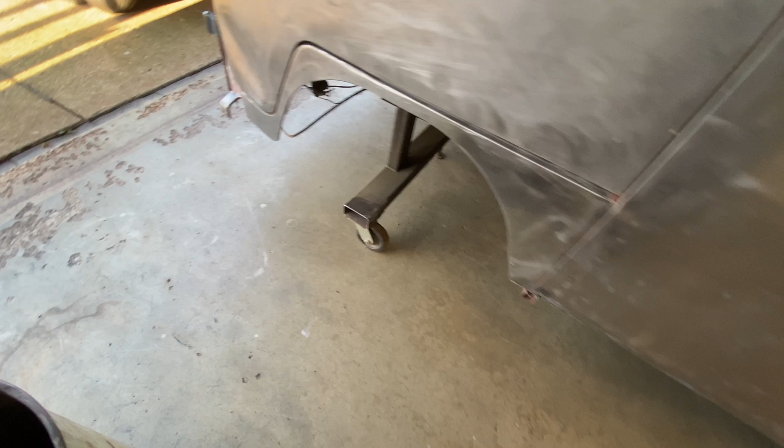Okay, so here's my plan. I already have this cart underneath the bus. I started cutting out these attachment plates that will get welded on to the cart. That's going to be over here. These plates get welded on here, and I'll drill some holes, be able to bolt the other plate to it.

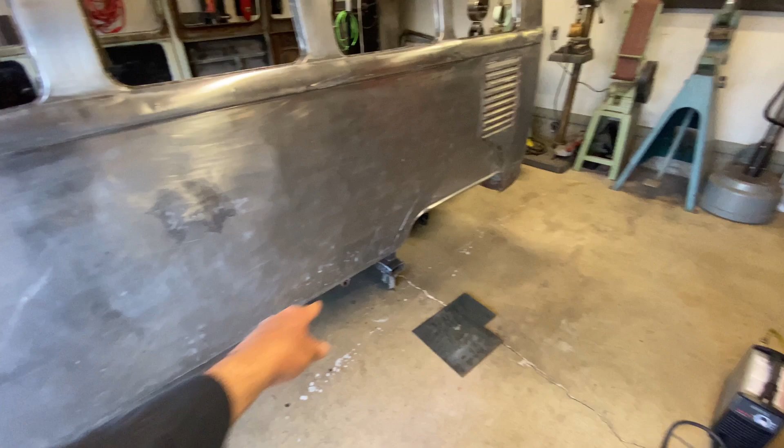That way it's removable. There's going to be a box tubing that goes the full length, front to back, full length of the bus, to be able to push off of. So this leg here will attach to this box tubing, and then there'll be this arm that comes up.

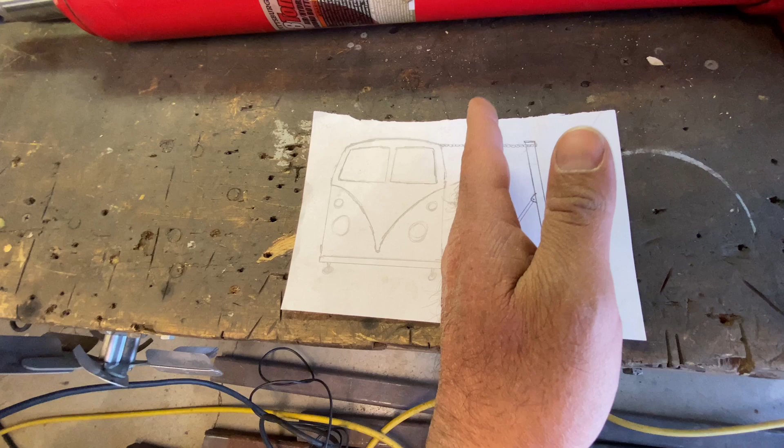And with this is a Harbor Freight pneumatic jack that's going to be right here, that's going to push this arm out, and then with a chain and maybe straps or different attachments hook onto the bus and start a controllable pulling of this side of the bus out.

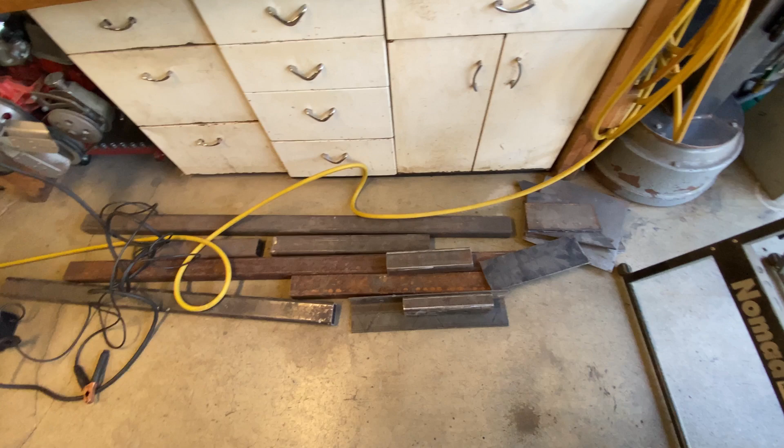I have most of the metal. This is a lot of my scrap metal that I already have laying around. So that's most of the materials, but I need to get this box tubing that goes the full length of the bus. So that's my next step. Let's take a ride, get that piece, we'll see what we can find.

And then once we get that, I want to start with that piece and then work my way out and make the jack. So let's take a ride to the metal store and try to find that piece.

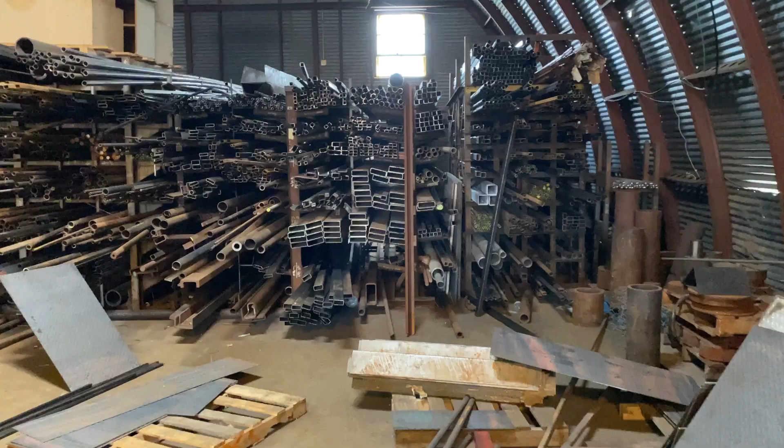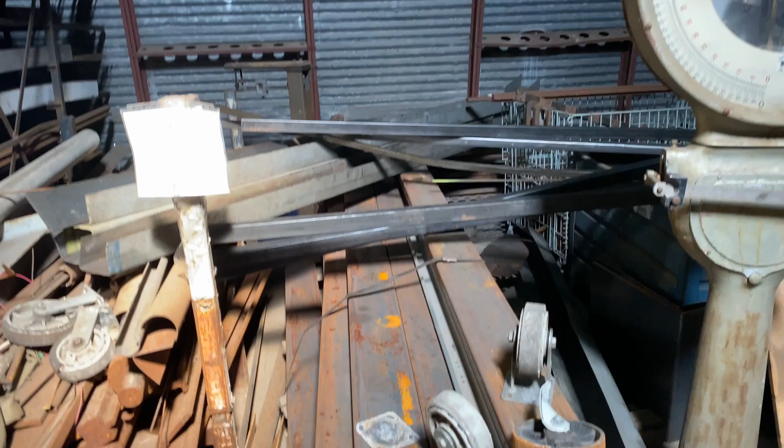All right, what I'm looking for is in here somewhere. Maybe in this back wall. Maybe one of these pieces. Precision scale, no, it's off.

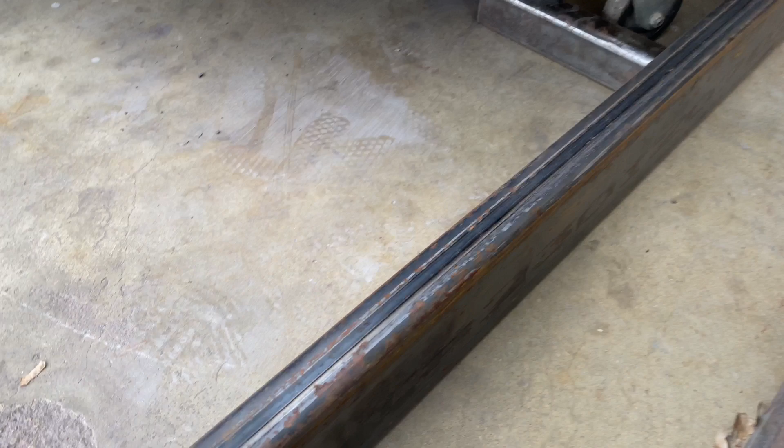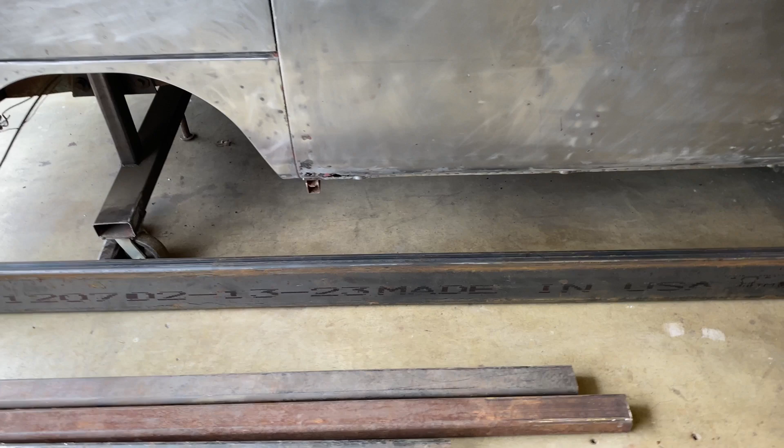Okay, so this is what I went with. It's this 2x6 box tubing that I found on that back wall in the hut, and it's definitely gonna be strong enough. And they had that whole section with these 10-foot pieces, and then I just had to add another 3-foot section, so I'll have to weld it, and then that'll make up the full length of the bus.

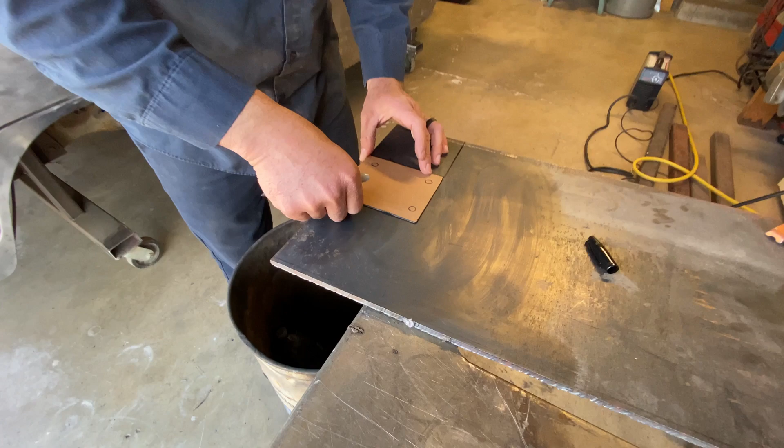All right, so I'm just going to trace this out and then cut them out, and this will be the attachment plates that attach to the cart here, and then I can bolt this box tubing on and then take it off after I straighten out the bus.

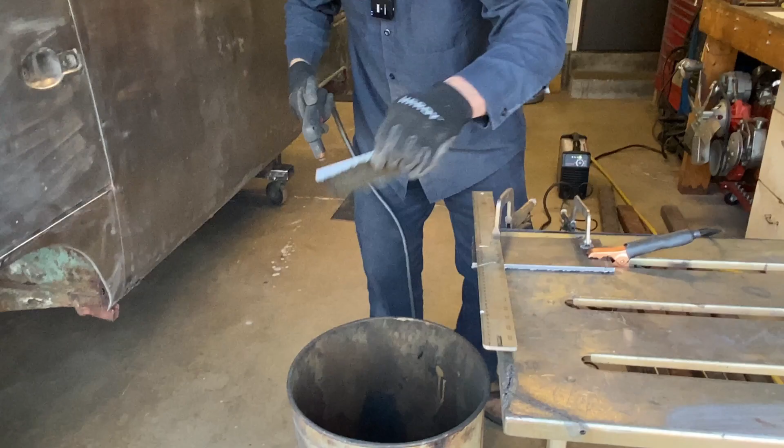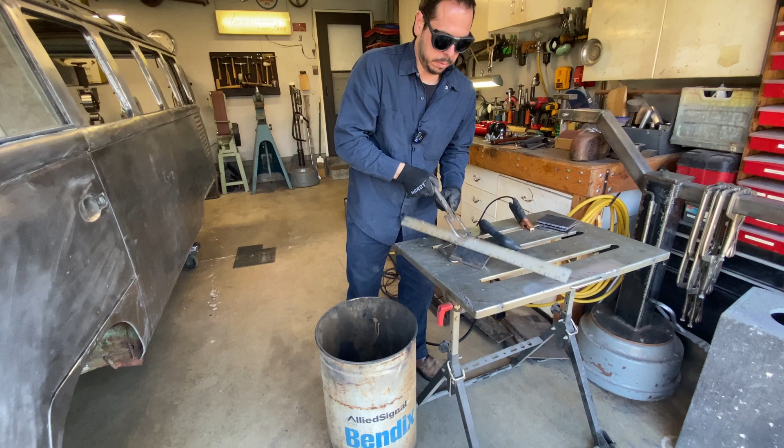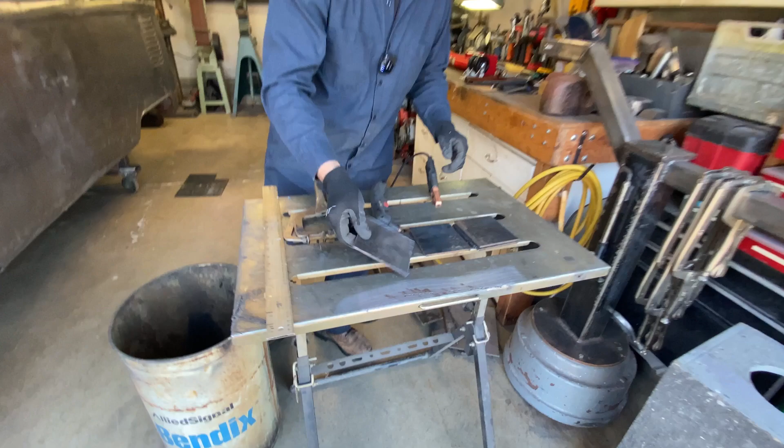Okay. Those are my plates. Those need just a little bit of cleanup, knock the slag off.

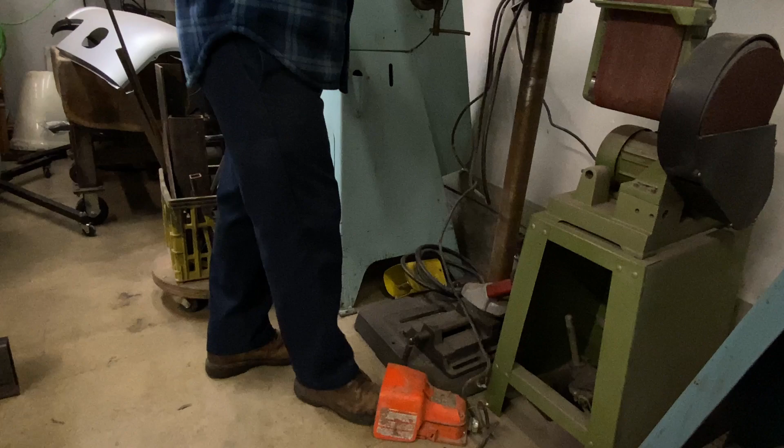I got my drill press hooked up to this foot operated switch. So that way I can just turn it on with my foot. So if things get a little hectic, I can just let go.

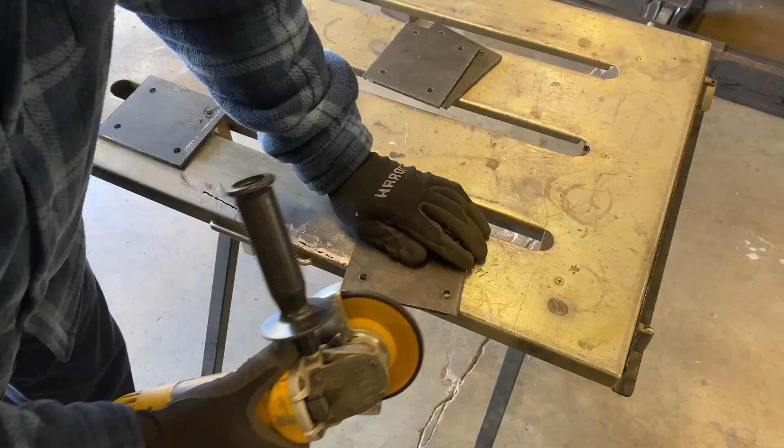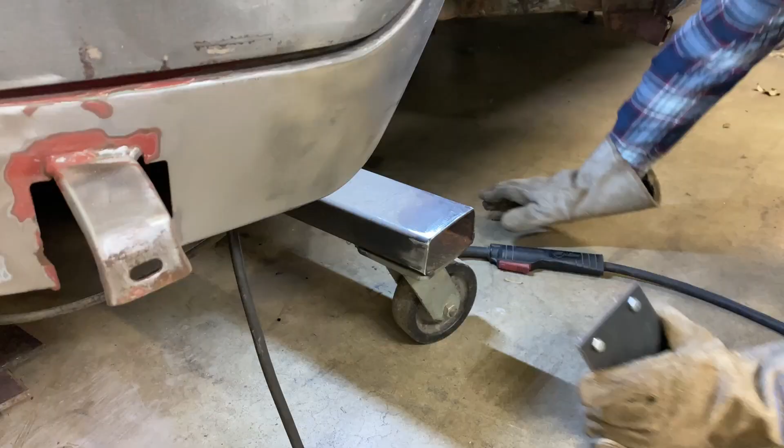All right, probably start with welding these plates on here. And then I'll weld this piece together. Let me get this out of the way for right now. I position it to where I can get it on and off. That looks pretty good. Let's tack it for now. Make sure, probably mock everything up, make sure I like how it's looking, and then we'll fully weld it on.

Okay, one done. Okay, let's see if we get this mocked up there. I got some boards I can put underneath it. Higher. Maybe I can turn it sideways.

Maybe. Yeah. Let's see what that looks like. Yeah, it looks pretty good. And then with that little extension, I'll go full length of it. Okay, let's do this one.

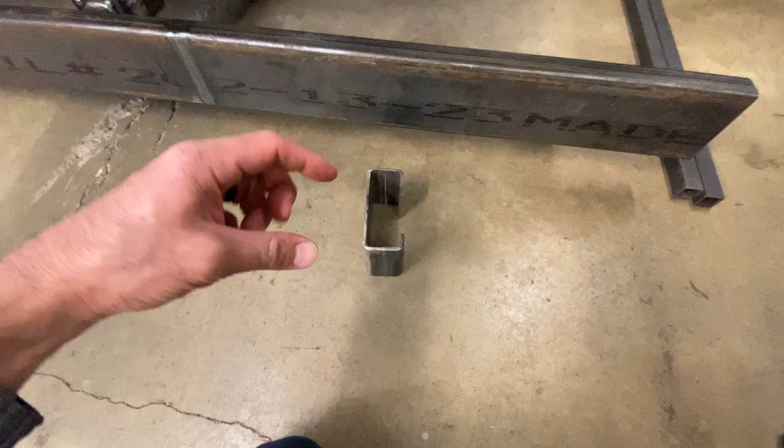Okay, I got that all welded up and bolted on. So that part is done. And I started making this piece. Now this piece is going to lock the puller on to this box tubing. So this was a larger box tubing that I had, and I cut it down and re-welded it to fit this 2x6 box tubing. And I wanted this attachment to lock on here.

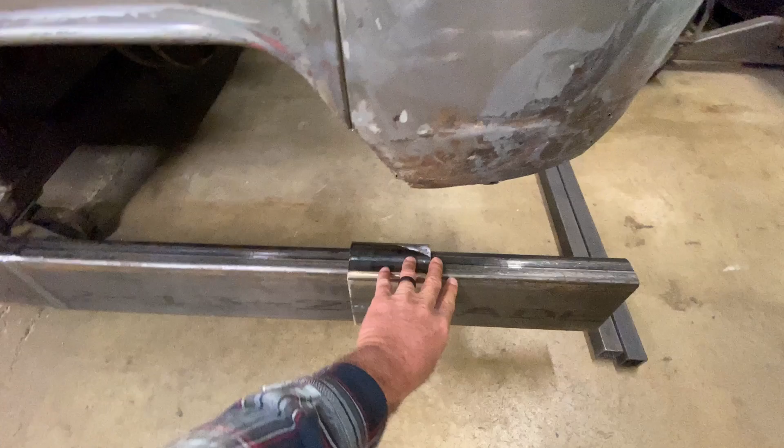That way, when I start pulling, it locks the bottom of the jack assembly on this box tubing. And I can then slide the whole jack front to back easily, and I'm going to have the casters on this end of the jack. So that should work pretty good, full range adjustment.

So now I want to start working my way out. So I'll probably mock up the jack on blocks of wood, get a good idea how far out I want to bring it from the bus. I don't think it'll have to be too far.

And then also, I may add some extenders like this box tubing, because this is just kind of sticking out here and I'm going to be pushing on it. It's going to be pretty strong, and I'm sure the roof is going to move before this does.

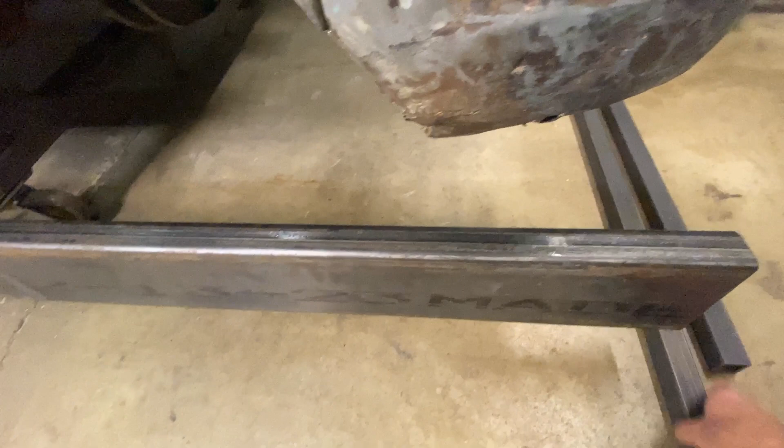So if I have to, I'll add a leg that comes out, and I can just add a leg. I can just do a couple of tack welds onto the cart and then out to here, and that will strengthen that. So I might do that too. This is just extra metal I had laying around, so we'll see if it needs that. So I can do one in the back and one in the front.

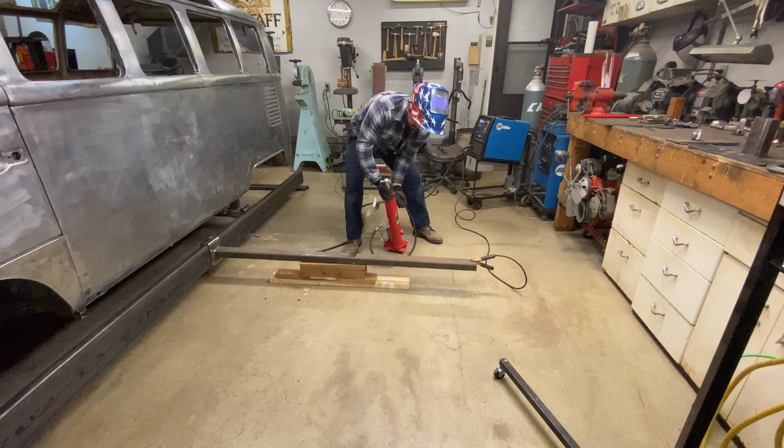But let's start on this part. So let's mock up this whole jack piece assembly, and then we can start building it up. All right, let's kind of get an idea where this needs to go. This is going to get cut down. I'm just not sure how much yet.

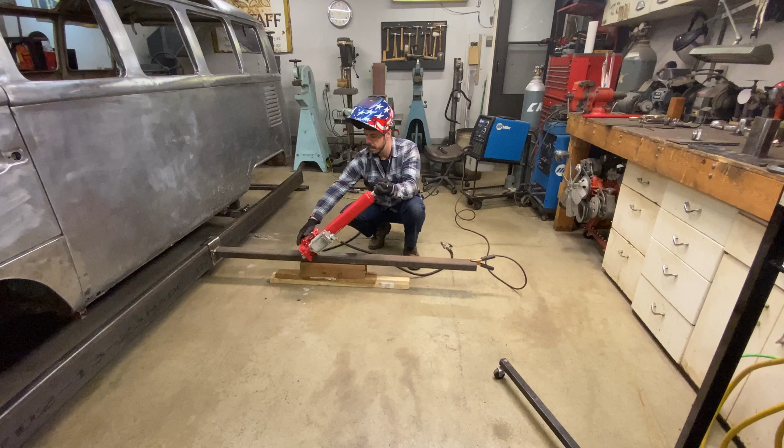It's pretty far away. Maybe about there. This will be extended. If I cut this here, I don't want it too far out. I don't really need it to be very far away. Let's clean that off a little better, a little closer.

Bolted here. I think that looks pretty good. I'll tack it, we can move it if we've got to.

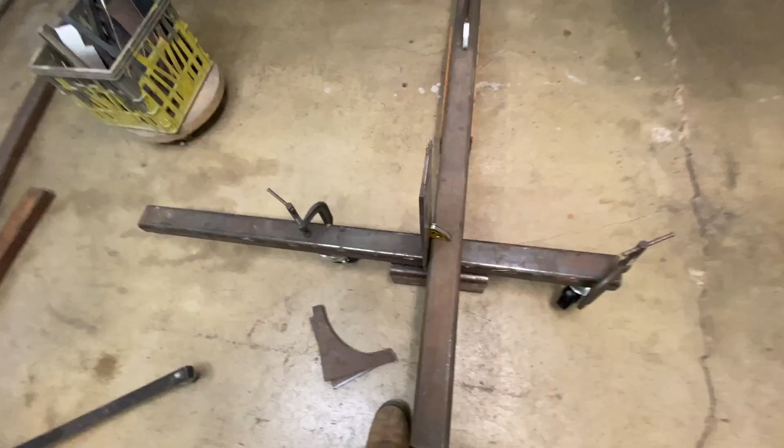Okay. I'll cut this in half. I got enough to put it for both sides. Drill it. Then that box tubing, this is the same size here. And this could be up here. Yeah, I like that. I'm gonna finish bolting these wheels on.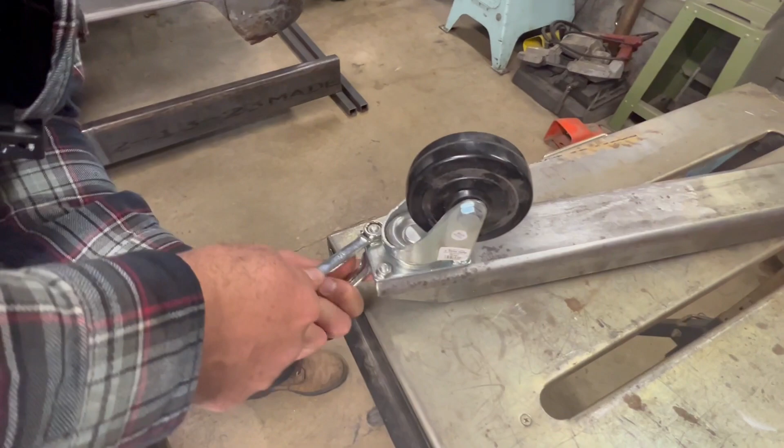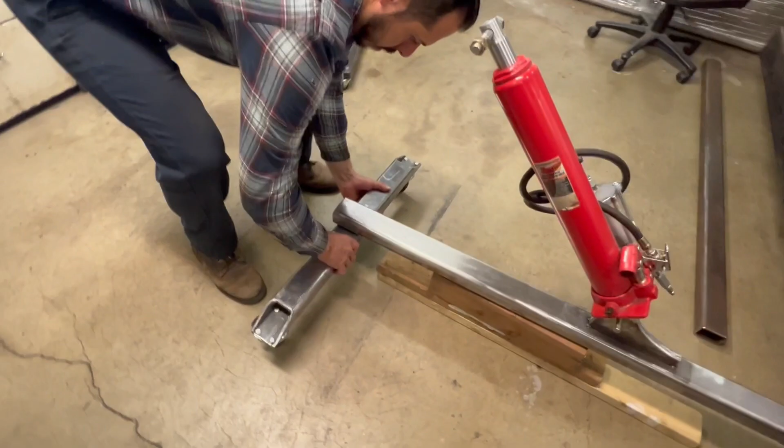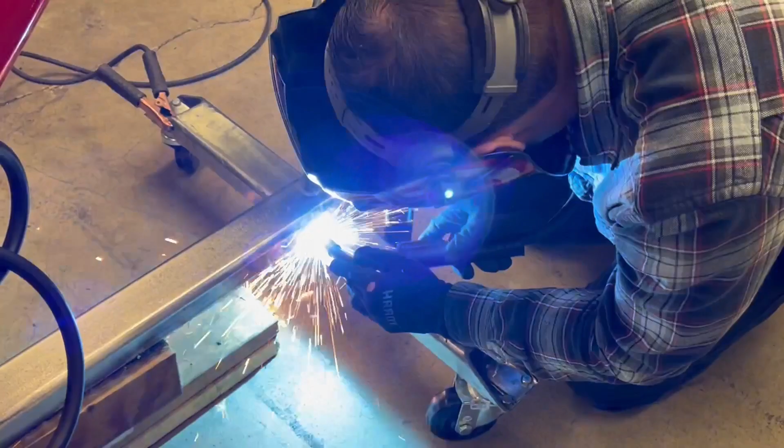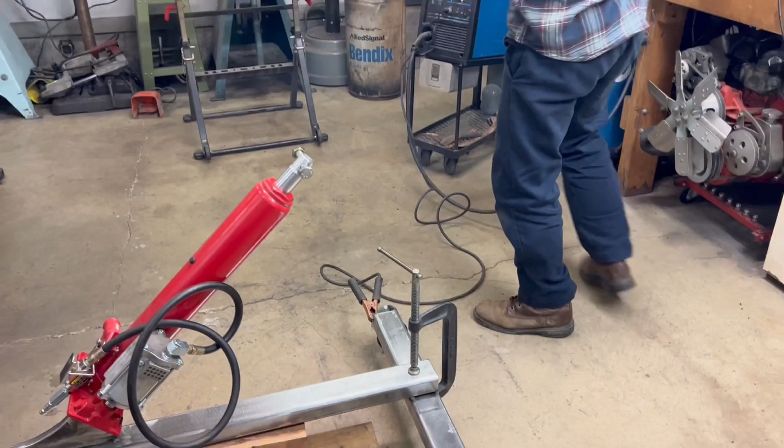Okay. Now we can pull the blocks out. It's 14 inches. Three-quarter. All right, now I can pull them blocks out of there.

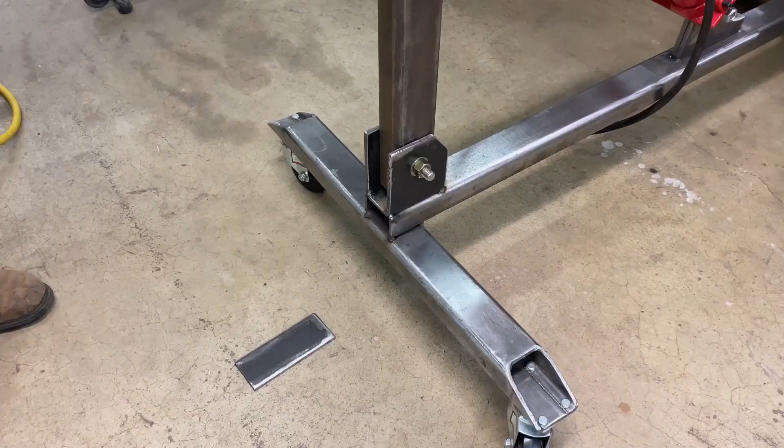All right, let's put this back piece on, and that's gonna hold everything together. And it's down, the reason it's not all the way to the top, that way this has enough room to keep pivoting back. I didn't want to lose any range on that. If it was up higher, there's a chance it may start hitting that plate. So that's why that's down a little bit.

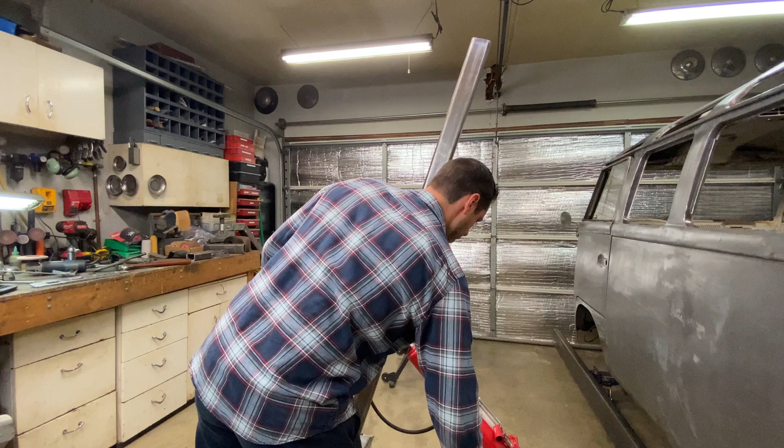You'll need a small bushing here and here to position this in the center. That's no big deal. That's plenty of range. Okay, let's take it apart, start welding, and then we can start pulling on this bus. Okay, I'm gonna just hit these areas that I'm gonna weld with the wire wheel, clean it up a little bit.

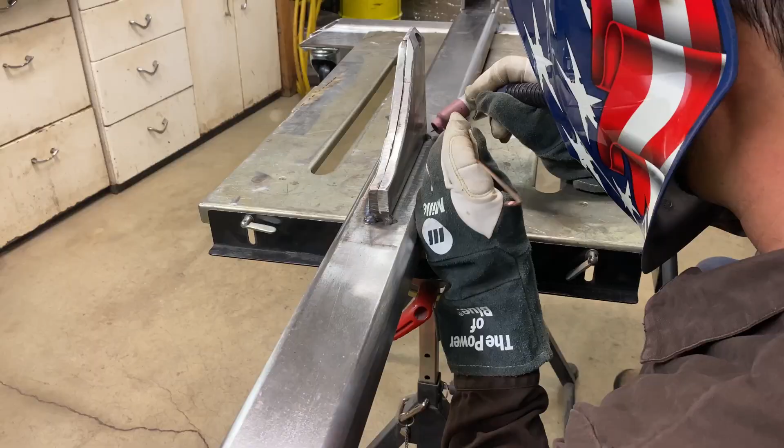Okay, I think I'm done welding on this lower part. So now let's take this down, start welding that bracket on there, and then weld these two together. And then weld it on to that bar, and then start putting it back together.

And the reason they're cut out in two different pieces was I was just using scrap metal that I had to make this piece, so I didn't have a full length like that, so I just cut them out individually. Let's weld them together.

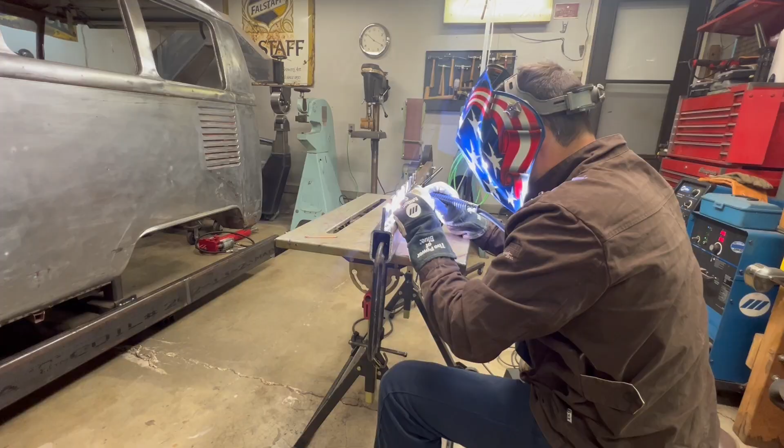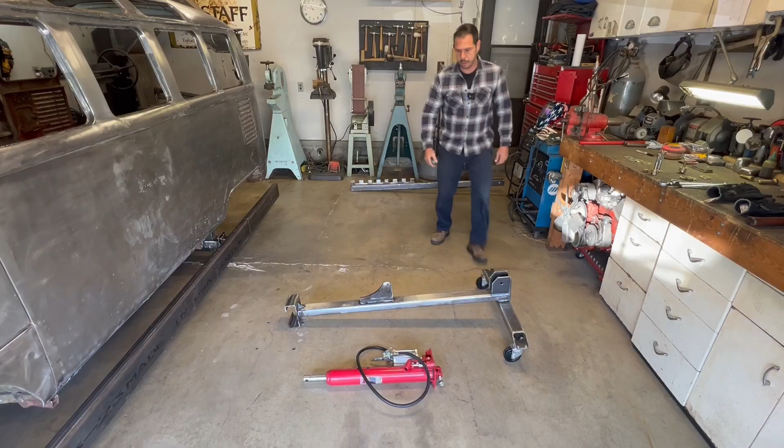Okay, that's welded on. So now we could let it cool and start bolting together. Let's try this thing out. I don't want to get burnt. It's still hot. No, it's good now. It's still warm though.

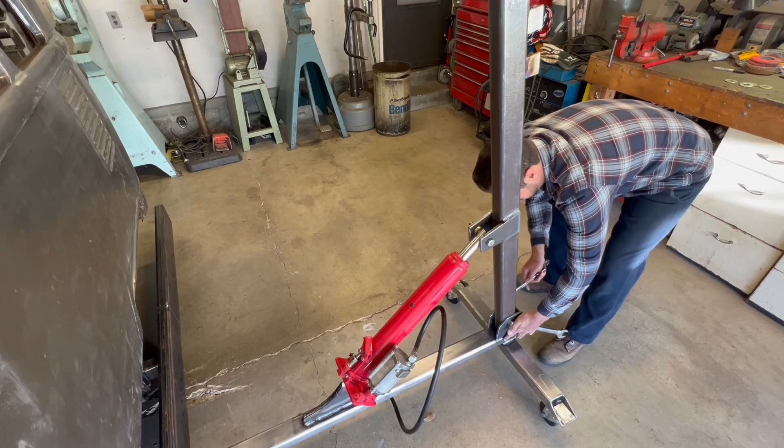That's it. Let's try it out. All right, I'm going to hook up this attachment. Try this on the gutter.

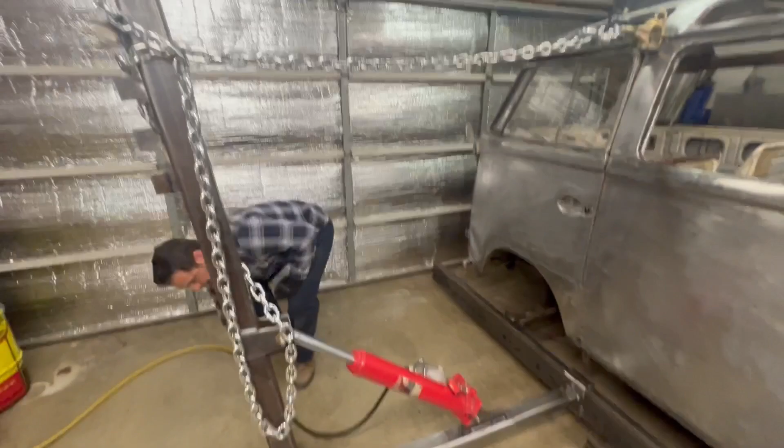All right, let's start pulling with that. Make sure that valve is closed.

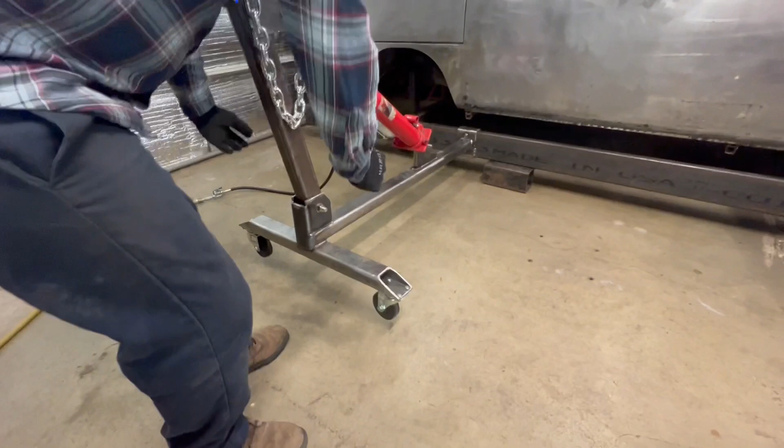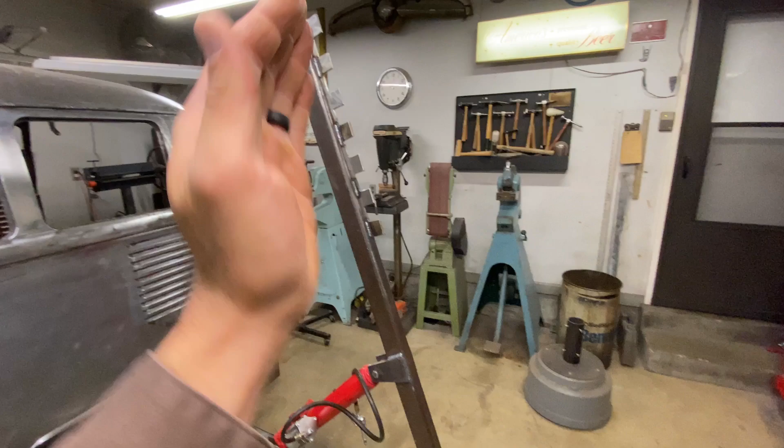I need to add a little bit of ballast weight back here, and I could maybe put a peg or something that comes out here to add weight. I decided I'm going to add an extension on the back of this and add weight back here. Because I'm pulling so high up and I'm pulling a roof, there's a lot of leverage pulling it, and it's actually twisting this 2x6 box tubing. I can see it twisting it because I'm pulling so high up.

So I'm going to add weight down here to give it a little bit of an advantage. This is more of that 2x6 box tubing, and I'll just attach it to the back, and I can stack these brake drums. These are tractor trailer brake drums. I got a couple of these I use for bases. Stack them over here, and hopefully that will help it from twisting that box tubing.

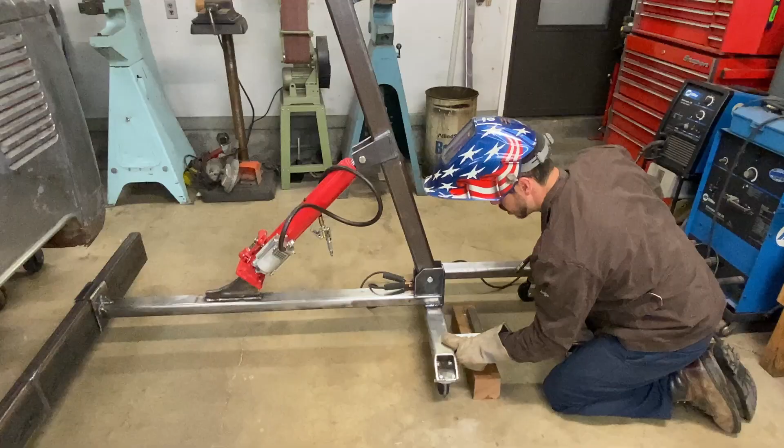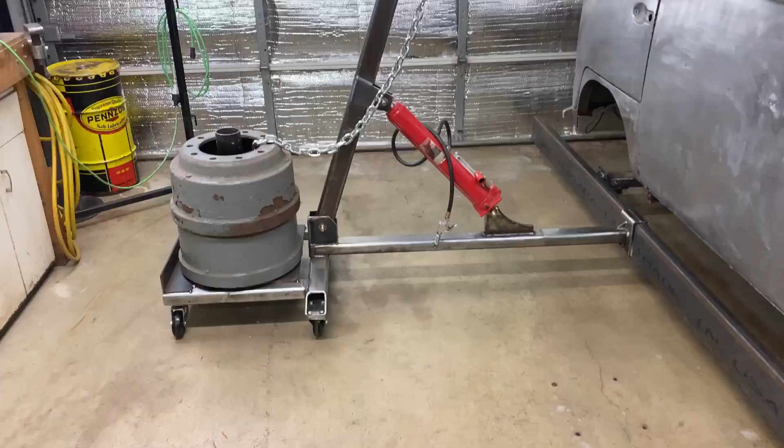Okay, that extension's done. Weight's on it. I'm hooked back up. Let's try it now. And then I'm also going to throw this moving blanket over the chain in case it slips off the bus, so it don't go flying. Let's add a little bit of safety to it. All right, let's see how this does now. Stand kind of out of the way.

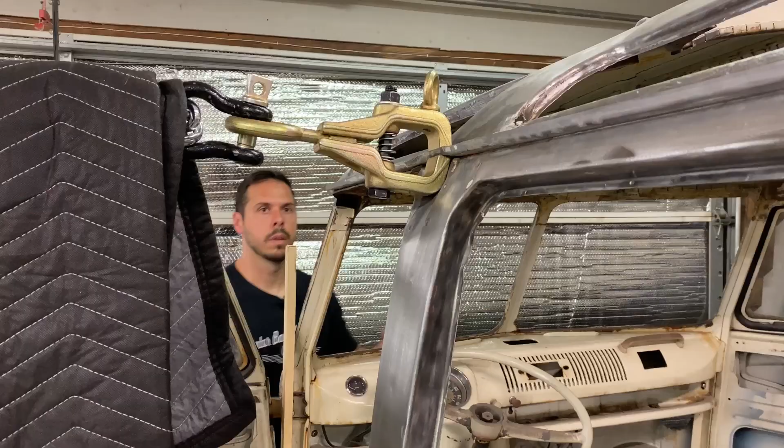Maybe I'll leave the door open. Let me bring you closer so you can see it pulling it. All right, I got tension on it. It's actually lifting the right side of the bus up. This side's staying down. That's good. That's working out perfect. I'm gonna give it some taps from the inside and kind of try to relieve any tension, but that's working out perfect. It didn't even budge it. So that was an easy fix for that.

I'm just doing a little bit at a time. I don't want to get crazy and do too much at once. I may even go down a little bit, keep pulling it instead of trying to get one spot too much. And I think this zone here is going to be the hardest. There's still a lot of structure in the front. The back, there's not a whole lot left. I might do that next, unhook it and pull in the back, and maybe get the back squared away and start working my way forward.

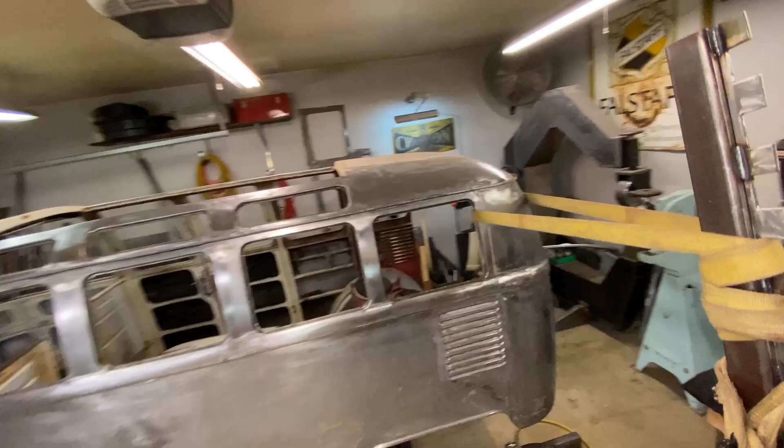All right, for this pull back here, I'm going to use a strap. I'm going to try not to dig into this, so I think the strap will work well for this. And I might add a block, maybe a block of wood in here so I don't crease in the corners. I can bend them back, but try to do a minimal amount of damage while we're pulling it. Yeah, put that block of wood there. Let me give it some hits over here.

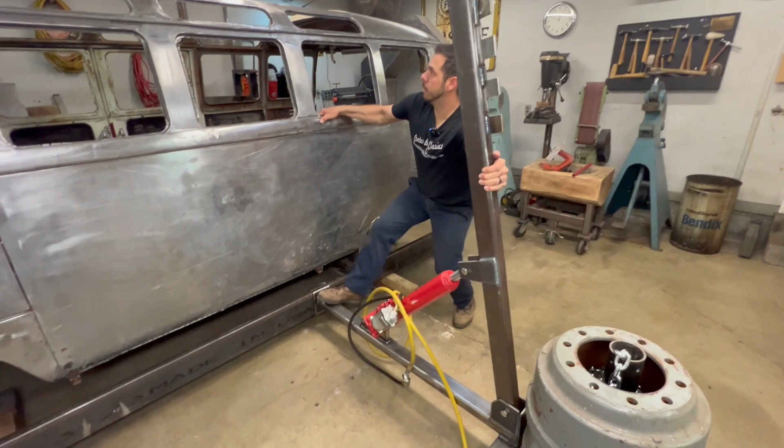It's gonna do a little damage to the gutter when it pinches, but this gutter was completely pancaked and folded down. I've already hit it out a little bit. So I know it's gonna dig into it a little bit. But right now I really just want to get the bus straight, and then any little areas like that I can fix, I can address later.

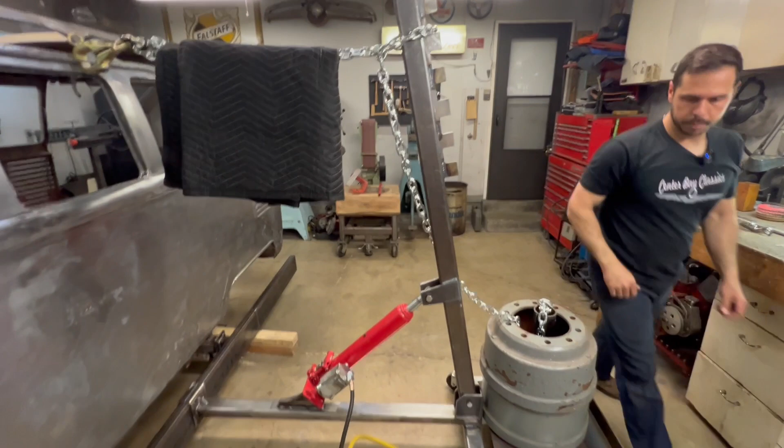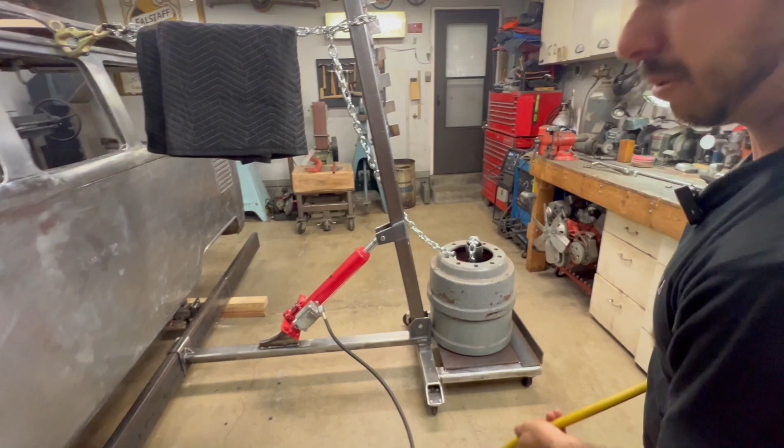I'm going to throw the moving blanket on there just to be safe, so that in case it slips off, the chain doesn't go flying. All tangled up here. There we go. So you can watch right here and see it. It's starting to pull this.

All right, I think we'll wrap this video up here, and the next episode we'll keep pulling, bolt on the rear hatch and the clamp on the right corner, and keep pulling this bus over and getting it straightened out.